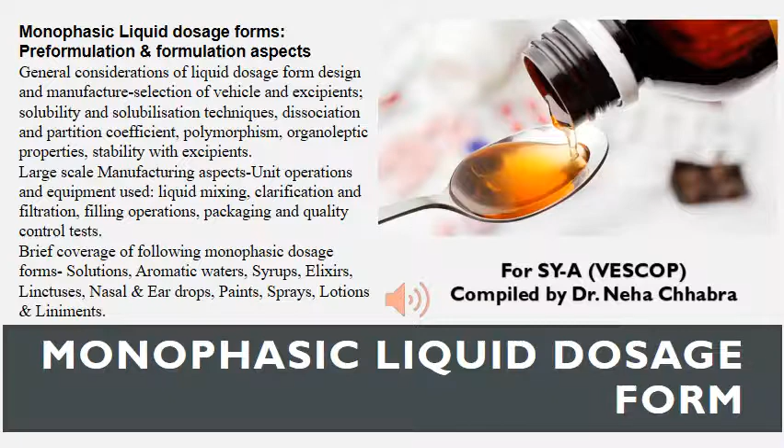In this lecture, we are going to cover the filtration equipment which is used at large scale.

We classify the filters on the basis of either the external force which is applied or the operation, the continuity. And the third way of classifying it is the nature of filtration, which means do we want a cake, or is it just for clarification purpose?

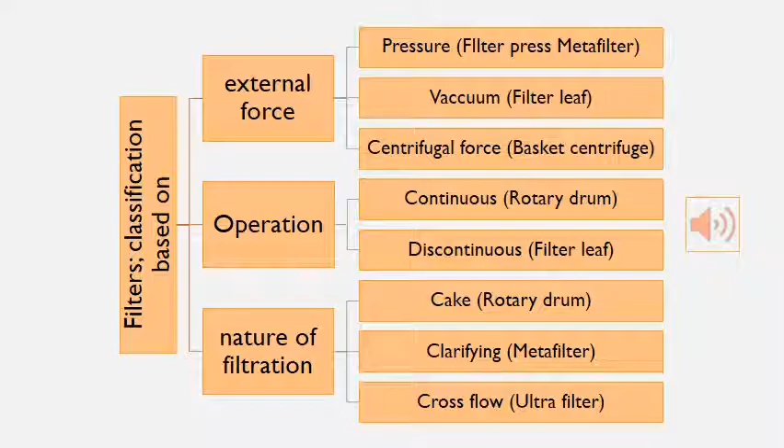What is most commonly used for classification is the external force which is applied. It could be pressure, vacuum, centrifugal force, or gravitational force. So here also we are going to explain some filters on this basis. In terms of operation, they could be continuous or discontinuous.

Now, if we talk about the principle of the filter leaf, it consists of a longitudinal drainage screen. This screen is covered with a filter cloth. You can understand it even better when you see a video after two slides and a diagram in the next slide. During filtration, the solid contents of the slurry are retained by the filter cloth, which acts as a sieve, and the clear liquid passes through the drainage system. The vacuum or pressure can be applied to increase the rate of filtration.

Let me tell you about its construction. It is a very simple form of filter. It consists of a frame enclosing a drainage screen or a grooved plate. The frame may be of any shape - square, circular, rectangle - and this whole unit is covered with a filter cloth. The outlet for the filtrate connects to the outside of the frame through suction.

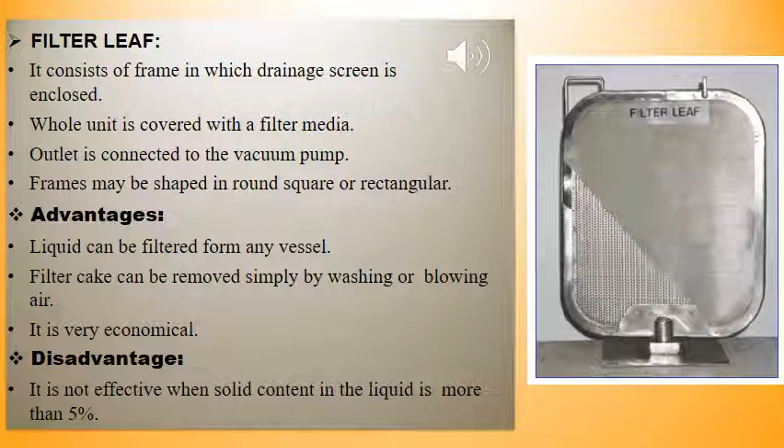Talking about its working: the filter leaf is immersed into the slurry which has to be filtered. Then a receiver and a vacuum system is connected to the outlet to extract the filtrate. The slurry passes through the filter cloth. The filtrate enters the drainage canal and then goes through the outlet into the receiver. Air is passed in reverse direction to facilitate removal of the cake if it is deposited.

The advantage of this kind of filter is that it is very simple, but used for a batch process. Pressure difference can also be obtained by connecting it with a vacuum or using pressure up to the order of 800 kilopascals. The labor costs are not very high, and the efficiency is quite good. The slurry can be filtered from any vessel, and the cake which is formed can be simply cleaned by immersing the filter in a vessel of water.

Now, what is a modification? The modification is that if we add many filters in a sequence - a variety of filter leaves - this provides a larger area for filtration. A number of filter leaves are enclosed in a special vessel into which the slurry is pumped under pressure. These are then connected to a common outlet, so that this outlet provides a large area of filtration. You can see it in the next video and diagram.

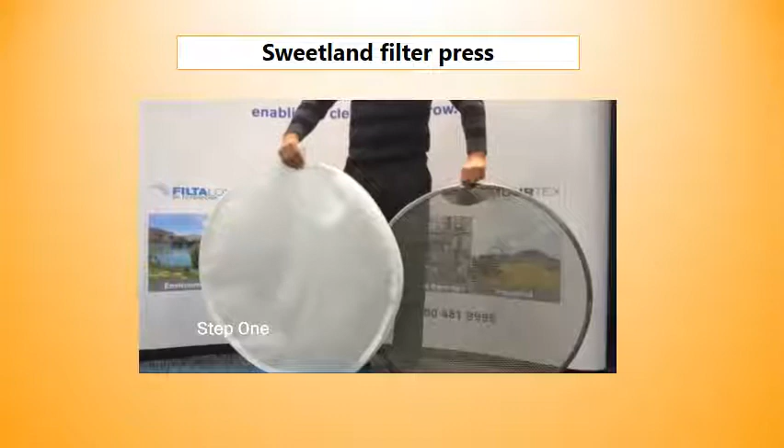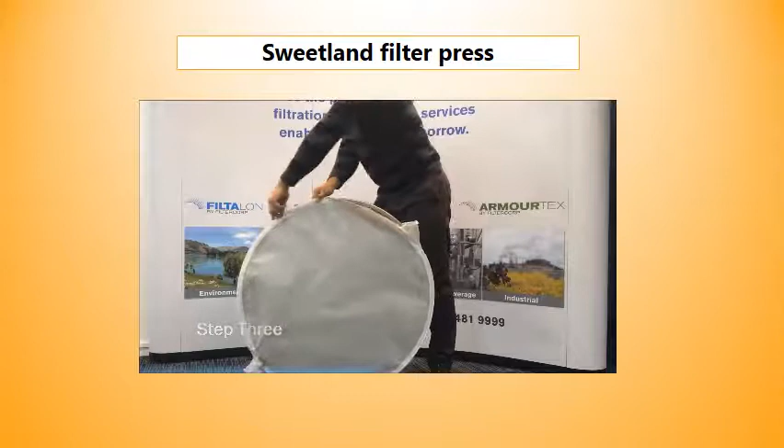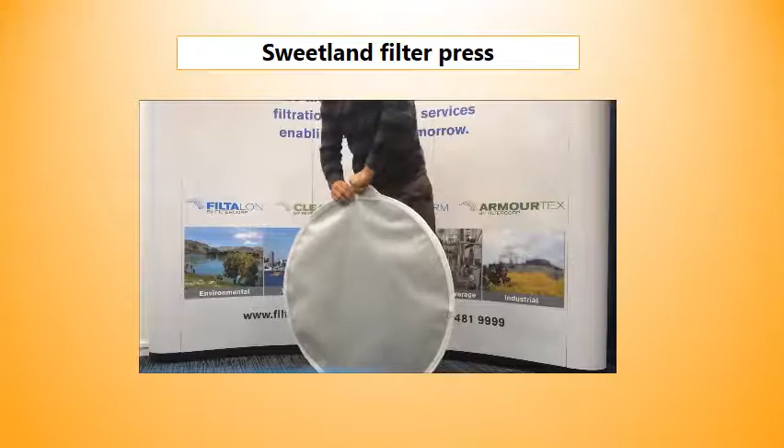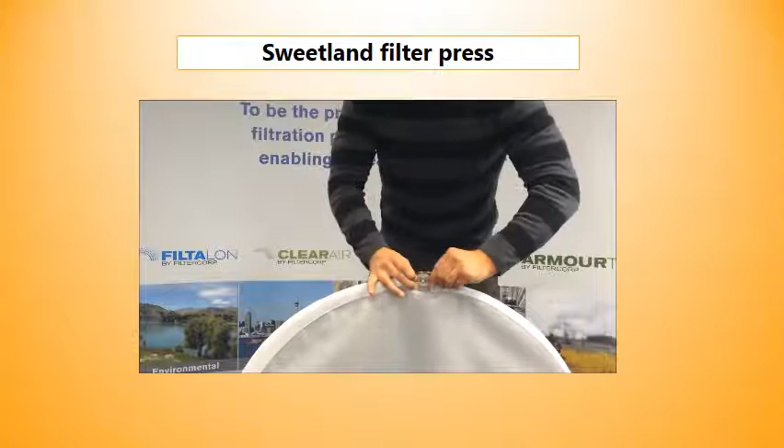Open the zip entirely. Step 2: place the Sweetland leaf filter press inside the press cover and pull the cover right over the plate. Step 3: pinch the edges together to pull the zip around the plate. The zip will be relatively stiff. Step 4: pull the material down the spout from the top. Secure with a cable tie around the metal spout. You are now ready to install your Sweetland leaf filter press back into position.

The plate and frame filter press works by the mechanism of surface filtration. This equipment consists of two units - one known as the plate, the other the frame. In between the two, there is a filter medium. I'll explain how they are actually arranged when we come to the construction. During filtration, the slurry enters the frame by pressure and then flows through the filter medium. The filtrate is collected on the plates and sent to the outlets.

In this figure, you can see two diagrams - one of a plate, the other of the frame. They are usually made up of aluminium alloy. Sometimes they are also lacquered for protection against corrosive chemicals and made suitable for steam sterilization. The diagram with the grooved surface is the plate and the one with open space inside is the frame. The frame contains an open space inside where the slurry reservoir is maintained, and for filtration, an inlet is there to receive the slurry. It is indicated by two dots in this description.

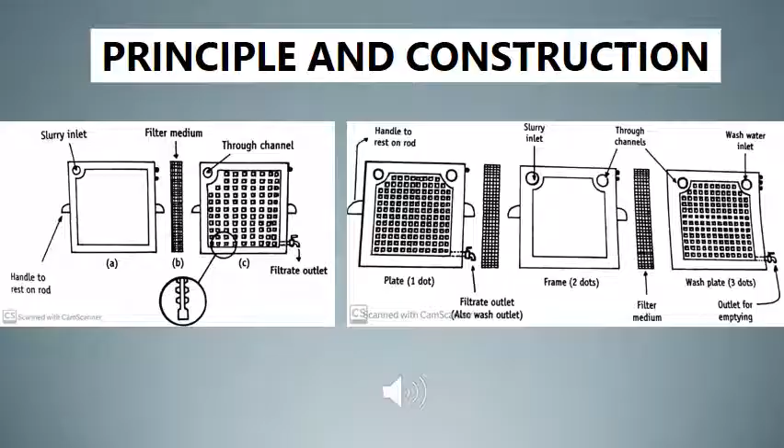Now let's start with the working of the plate and frame filter press. The working can be divided into two steps: one is filtration, and one is washing of the cake. Washing of the cake is another modification which we can add to the construction. It is not necessarily present in the construction, but it is a modification—an improvised version of such a press. So we are going to discuss it in the working.

Basically, the slurry enters the frame from the feed channel. There will be a feed channel from which the slurry enters the frame, and then it passes through the filter medium on the surface of the plate, which in the diagram is marked by 1 dot.

The solids together form a filter cake in the frame. The frame is denoted by 2 dots. The thickness of the cake is half of the frame thickness, because filtration occurs on each side of the frame. Therefore, two cakes are formed which eventually meet in the center of the frame.

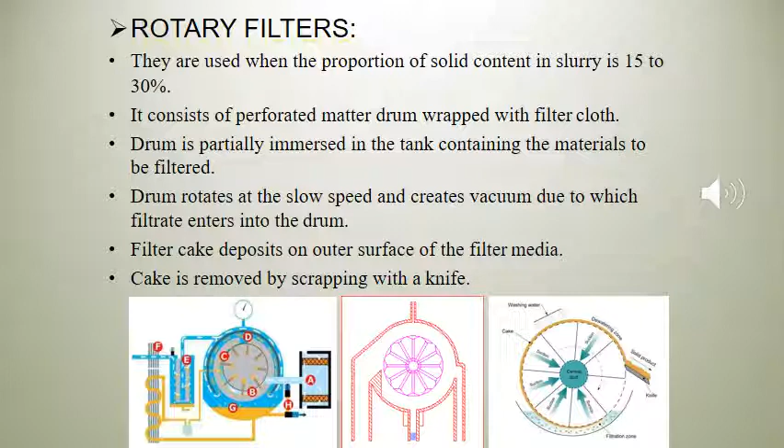Appropriate connections are made from each unit through the rotating valve at the center of the drum. In operation, the drum rotates at low speed so that each unit passes through different zones. There are 5 different zones: pickup zone, drainage zone, washing zone, drying zone, and the cake removal zone.

Let me elaborate each of these zones in the working of rotary drum filters. First, the slurry is kept in a trough. For filtration, the drum is dipped into the slurry and rotated at a speed less than 1 revolution per minute. As the drum dips in the slurry, vacuum is applied to the outlet, which is connected to the filtrate receiver.

So a cake is formed on the surface of the drum and is drained or partially dried by vacuum. As the drum enters the washing zone, it is sprayed with water to wash the cake. Retaining the vacuum connection drains the cake and produces partial dryness of the formed cake.

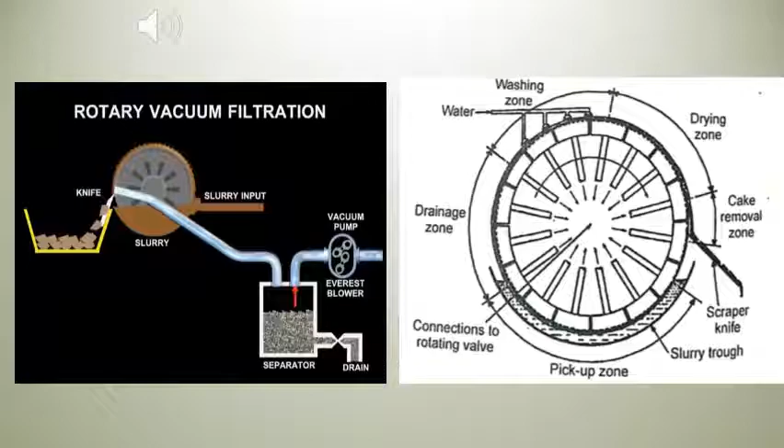The advantage of the rotary filter is that it is an automatic process, so there is continuity during operation, and therefore the labor cost is also low. The filter has a large capacity, so it is suitable for filtration of highly concentrated solutions. The speed of the rotary drum can be varied to adjust the cake thickness. If we pre-coat it with filter aid, this will also accelerate the rate of filtration. And of course, it has a large surface area, which is always beneficial.

But if we talk about the limitations, there are many moving parts involved, so the one-time cost is high. In addition, accessories are also connected, like vacuum pump, vacuum receivers, and agitators, which add to the cost and maintenance. Then the cake tends to crack due to air drawn by the vacuum system, so washing and drying are not efficient. Being a vacuum filter, the pressure difference is limited to 1 bar, and hot filtrates may boil.

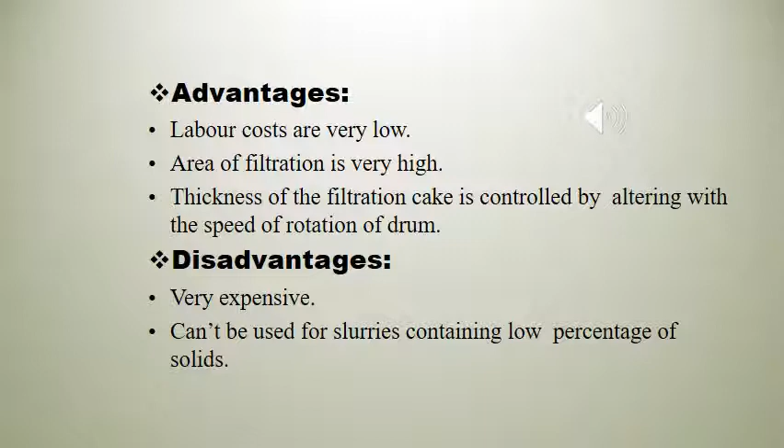It is suitable only for straightforward slurries, being less satisfactory if the solids form an impermeable cake or will not separate cleanly from the cloth.

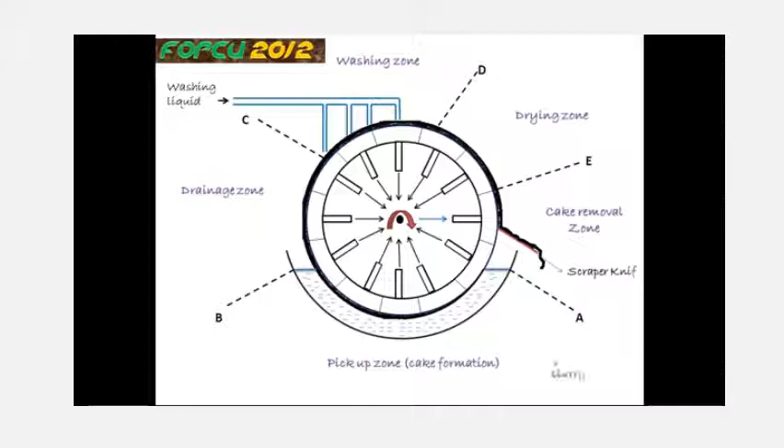There are two types of centrifuge filters. One uses perforated baskets and performs operation like a spin dryer, what we see in our washing machines. The other type uses solid walled vessels, where particles sediment towards the inner wall under the influence of centrifugal force.

The speed of this basket can be changed. The more the speed, the more stress the basket faces. The product enters centrally and is thrown outwards because of centrifugal force acting on it, and is held against the filter cloth. The filtrate is forced through the cloth and removed via the liquid outlet.

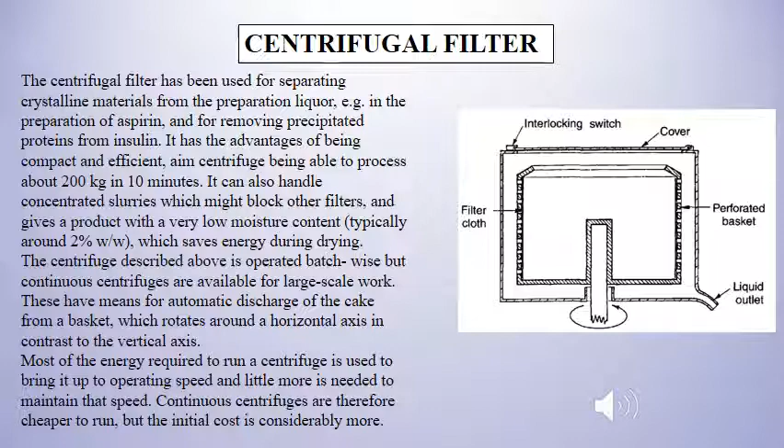Next in line are tubular bowl centrifuges. These are used when you have to separate liquid, during antibiotic manufacturing, purification of fish oils, and removal of very small or solid particles that are compressible or slimy, which could generally easily block the filter medium. It's also used for separation of blood plasma from whole blood.

These centrifuges are very compact. They have a high separating efficiency and are good for separating difficult solids. But they have a limited capacity, and are complicated to construct to achieve the required speed and minimize the vibrations produced during the process.

It consists of a cylindrical bowl that rotates at a very high speed. The product enters at the bottom, and centrifugal force causes solids to be deposited on the wall as it passes up the bowl, the liquid overflowing from the top.

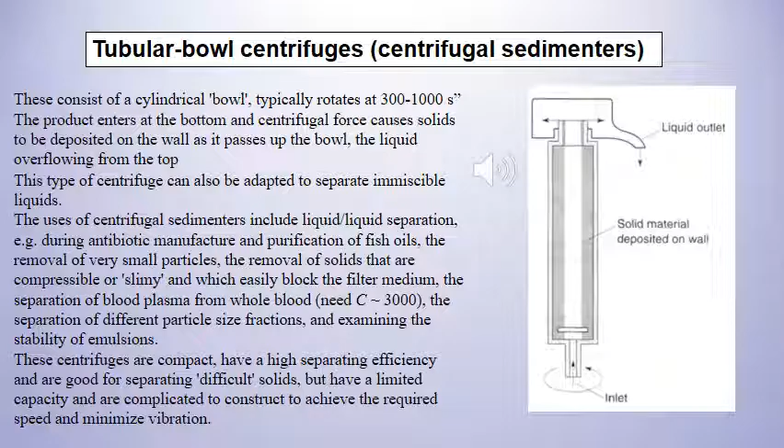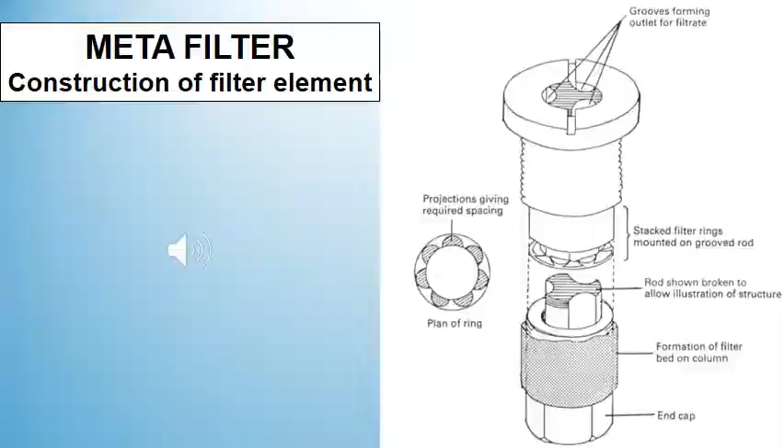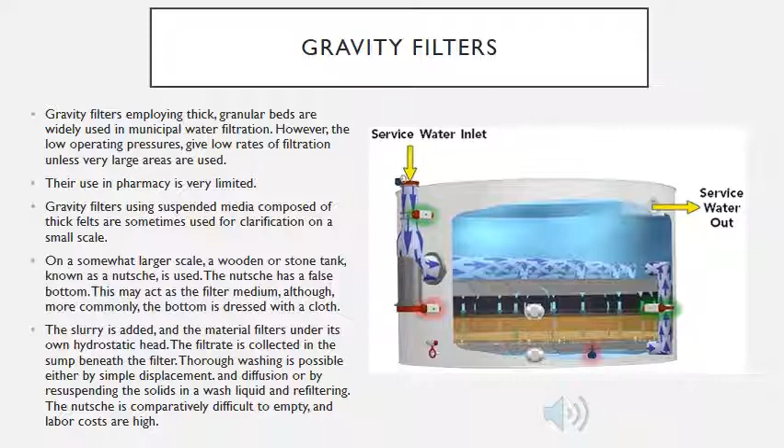The question comes, how should we select the filtration equipment? There are some general facts to keep in mind. First, we need a fast rate of filtration at any time. The cost should be low, both at the time of purchase and for maintenance. It should not undergo any kind of corrosion on interaction with the filtrate or the slurry. The cleaning should be easy, so that we can maintain it easily.

It should filter a large volume of product before cleaning or replacement of the settled cake. There should be no interaction with the filter media, since sometimes the components of the filter are leached due to interaction, or there is degradation or swelling of the filter medium. Then the size and type of equipment and time needed for the process is a very crucial factor while deciding what filter equipment we are going to use.

The pore size of the membrane matters too, depending on what size we want to filter, whether we want the filtrate or the material that stays on the pores. So the size must be finalized according to that.

Then, if a product to be filtered requires heating, when these are highly viscous products, we need to heat them to lower the viscosity. So the steam jacket should be fitted to the filters, if there is a possibility to do that. The last point also applies in case of sterilization, where we apply pressure or have to sterilize while filtering. The filter should be able to withstand that pressure.